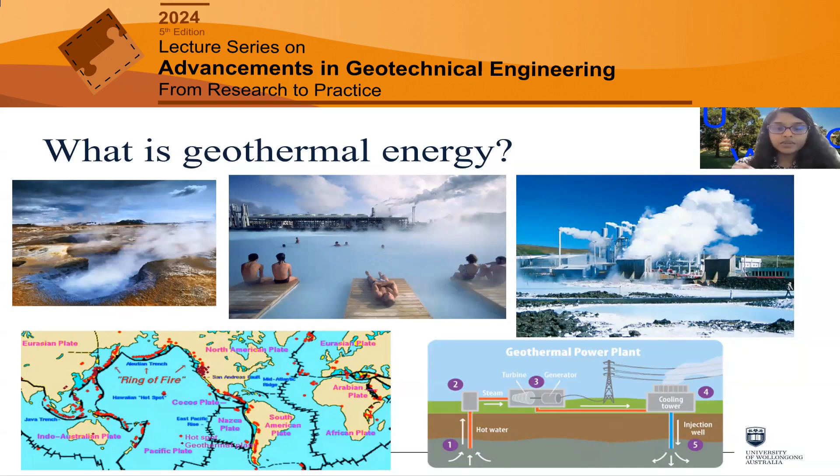And this image shows a geothermal-based electricity plant, and you can see these systems still use turbines to rotate for electricity generation, but unlike a traditional fossil power plant, they don't need to burn coal or gas. Instead, they use hot water or steam to run the turbine. So that's the difference. But geothermal energy is not just electricity. There are various other applications.

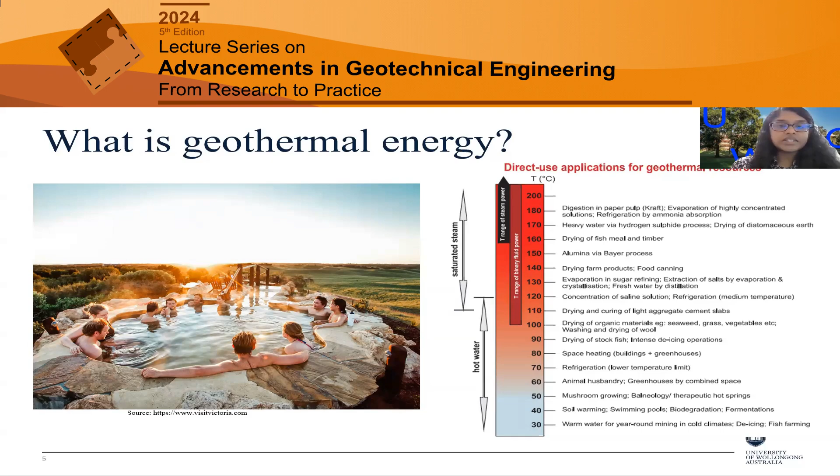As this slide shows, apart from electricity generation, we can use geothermal energy for different applications, like space heating, recreational purposes, geothermal heat pumps, and many different industrial and agricultural purposes, depending on the temperature. And this is an image from geothermal pools located in the Mornington Peninsula in Australia. These types of shallow geothermal systems are generally considered a more accessible form of geothermal energy, and can be used in residential, commercial, and various industrial settings.

So based on the example of Iceland, now I think it's clear near tectonic boundaries, volcanic areas, there is readily available, accessible geothermal heat at shallow depths. These are called conventional hydrothermal geothermal systems. They can be water-dominant or vapor-dominant systems based on the temperature and pressure. Technologies to utilize these types of systems are readily available, specifically for geothermal-based electricity. And almost all current commercial geothermal production is based on these types of systems.

However, when it comes to other parts of the world, the biggest challenge of geothermal technologies is to create optimal flow rates, because the technology relies on flow rate as well as temperature difference. And when it comes to deep reservoirs, we might need to create fractures artificially to enhance the fluid flow, which we call reservoir stimulation. In recent years, researchers have proposed various different configurations and use of different types of fluids in order to increase thermal efficiency.

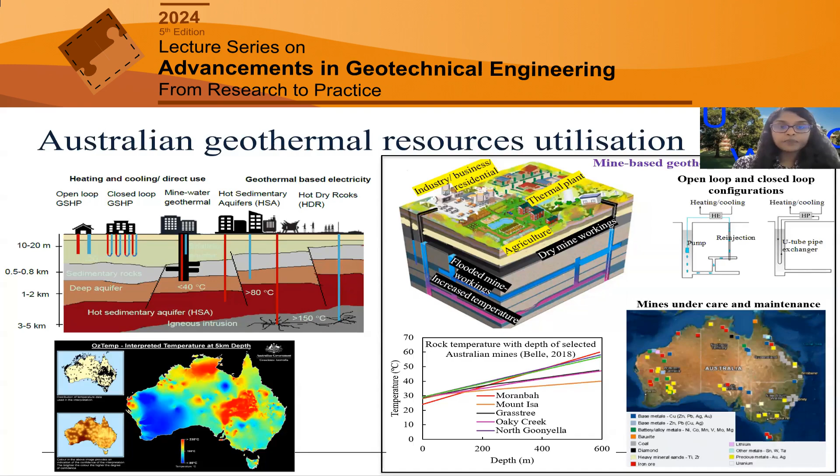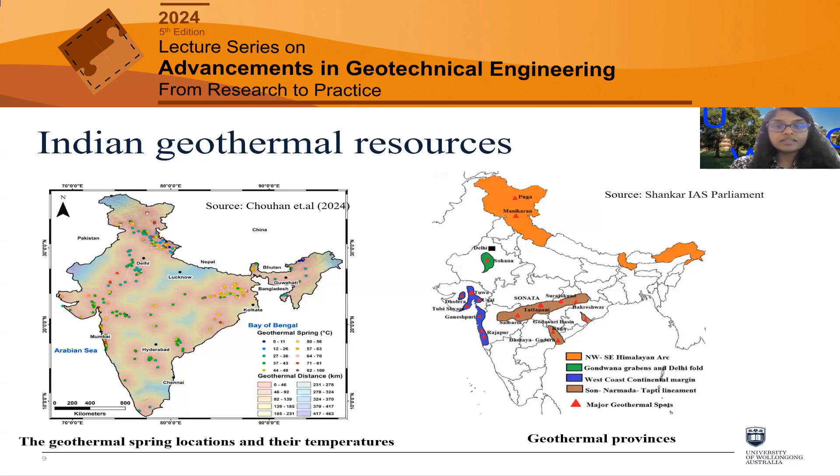But some of the challenges both countries face are high costs and lengthy timelines for exploration, the need for more comprehensive data when it comes to heat sources and fluid dynamics, and of course policy and investment support to overcome these kinds of barriers.

Next, I'm moving to the presentation regarding geomechanics research, why geomechanics research is essential in these types of fields. So when it comes to geothermal energy, geomechanics provides essential fundamental inputs in many areas. Primarily, it's very important to understand the properties of subsurface rocks and their ability to store and transmit heat. We call it reservoir characterization. And it's very important to understand the stresses and strains within the crust, because that affects reservoir stability as well as fracture propagation direction.

As I mentioned earlier, when permeability is not sufficient, it's important to create fractures artificially. And it's important to ensure integrity of geothermal wells, prevent leakages, and maintain long-term fluid transport and thermal recovery. Therefore, the knowledge of coupled thermo, hydro, mechanical, and chemical mechanisms is very important when it comes to geothermal systems. And it's a very complex problem. And this sketch summarizes these processes and how they are interrelated.

Some examples. For example, temperature, pressure, and chemical effects change fluid and rock properties. And temperature and pressure can also change hydraulic and chemical processes. They can change fracture pathways, cause mineral dissolution, precipitation, etc. So multi-physics coupling techniques are usually used to uncover these challenges.

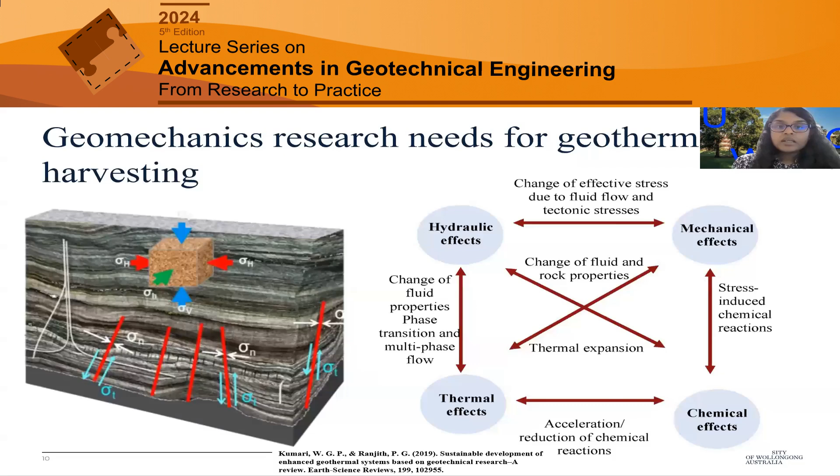Another important aspect I want to highlight is the necessity to consider the scale effect, because in today's presentation I'm highlighting mainly the micro scale mechanisms. But now here we need to consider the scale effect across these coupled processes. So we often use small scale laboratory experiments to understand fundamental mechanisms,

and micro scale observations and analysis is quite important to understand the underlying mechanisms, such as pore areas, rock fragmentation, tortuosity in fluid flow through these pores and fractures. So these types of mechanisms are quite important to explain the experimental observations. And then we need large-scale advanced experiments which can connect these micro and meso-scale scenarios to field-scale observations.

So this framework shows various techniques that can be used to capture these underlying physics to develop constitutive equations and apply that knowledge to understand coupled processes and interactions that can be applied in the field scale ultimately. Here you can see this cross-scale modeling that can capture this whole spectrum, which can be considered as a framework for future research.

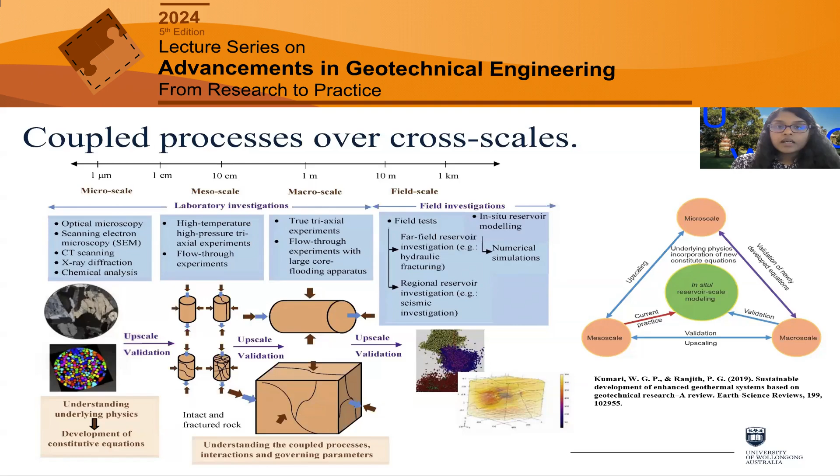Next, I would like to briefly go through some of the research studies that I conducted. First, thermomechanical behavior of granite rocks. I mainly used granite for my PhD and following research, because in Australia we mainly targeted hot dry rock reservoirs, which are essentially crystalline rocks. So the thermomechanical behavior of these reservoir rocks is influenced by various factors like rock type, mineral composition, porosity, existing fractures, and environmental conditions like temperature, stresses, fluid saturation, etc.

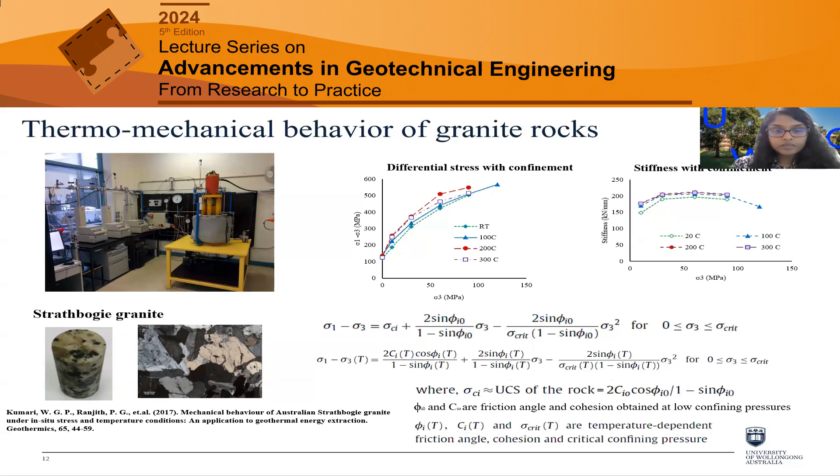Here you can see the geothermal effect of heating and cooling on mechanical behavior, because this is another important research question, because geothermal reservoirs are often subjected to large temperature gradients because of injection of cold fluids into these hot reservoir rocks. So traditionally we use water in these types of systems.

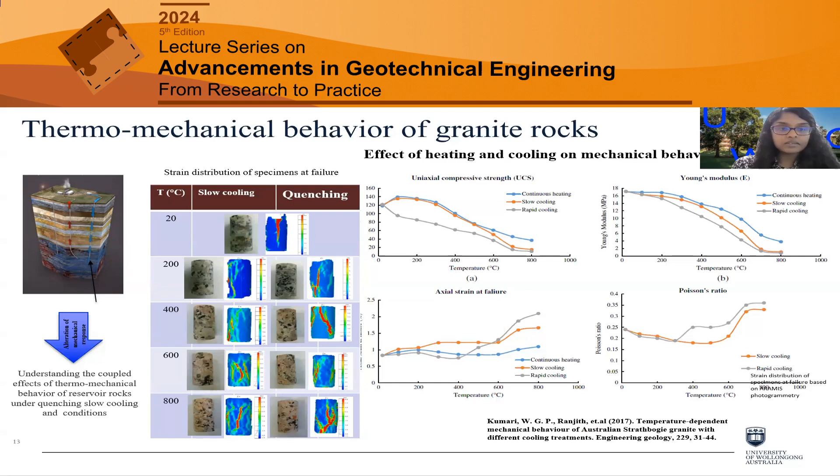Researchers have observed significant increment in thermally induced crack density after 600 degrees. The main reason suggested is alpha to beta transition of quartz and many other mechanisms. So here, this tested granite had over 50% of quartz, and we can clearly see beyond 600 degrees significant thermal damage. We further observed this with microscale observations.

In this study, we looked at effect of thermal cycles, cyclic heating and quenching, which is very common in geothermal reservoirs. And again, you can see the strain distribution during the failure. So below 300 degrees with minimal heating and cooling cycles, we can see predominantly shear-dominated, relatively simpler fracture planes, but with increase of heating and cooling cycles as well as target temperature, we can see quite complex fracture planes, especially beyond 500 degrees.

And here you can see the effect of temperature and the cyclic quenching impact on mechanical properties, again showing a significant reduction of strength and in the stiffness of the rock, as well as higher deformation and lesser brittleness at higher temperatures and heating and cooling cycles.

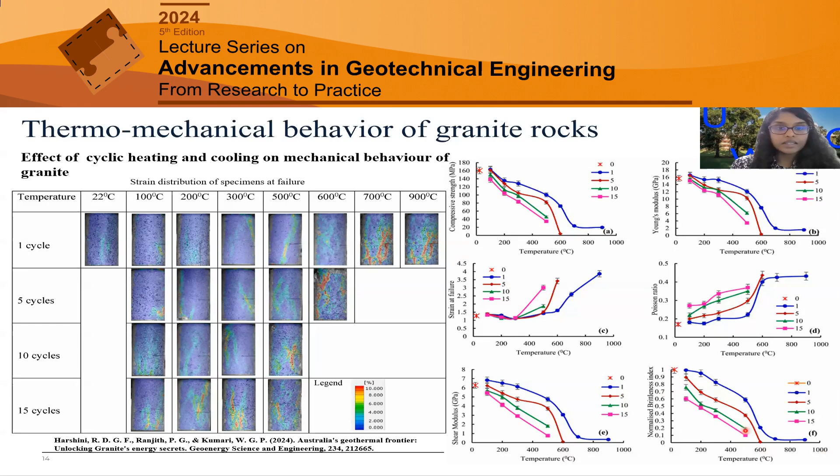We also used acoustic emission detection technology to study crack propagation in high temperature conditions when they are subjected to shearing. We know when brittle material is under stress, strain energy is released during the development of new cracks or widening of existing cracks. We can capture this energy using acoustic emission technology. Researchers have divided the crack formation into different stages, like crack closure, crack initiation, secondary cracking, crack damage, etc.

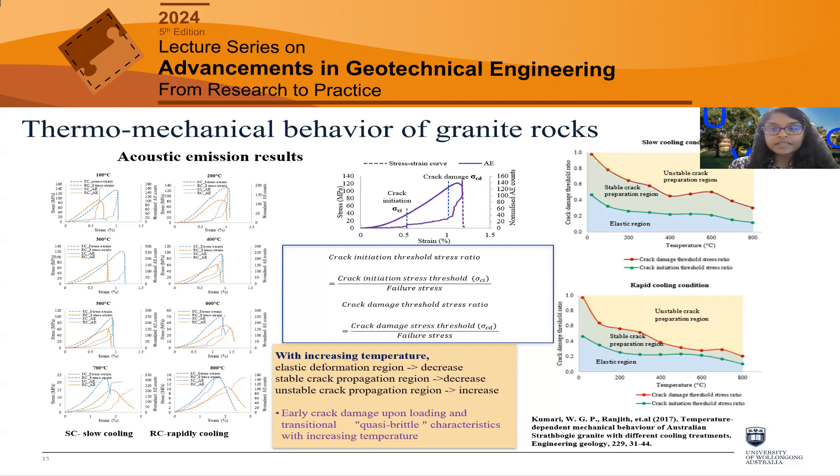And these are the experimental results for tests conducted under different temperatures and different cooling scenarios. So acoustic emission analysis further explained thermally induced damage due to heating and then cooling. With increased temperature, elastic region as well as stable crack propagation region is decreased, and unstable crack propagation region is increased, and cooling can further accelerate these mechanisms.

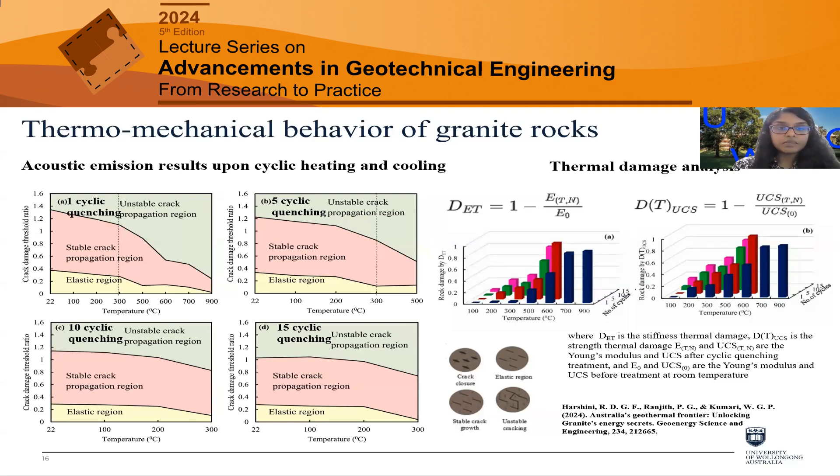Given today's focus is on integrating microstructural analysis in geothermal geomechanics, next I will move to microcracking mechanisms triggered by this thermal loading. So among different microscale techniques, computed tomography or CT imaging has evolved to quantify pores and microfractures, providing digitization of this internal structure. And by examining micro-CT, we could observe substantial matrix degradation in reservoir rocks caused by thermally induced microcracking.

And results show that propagation of cracks through grain boundaries increases significantly with the increase of preheating temperature because of the thermal stresses and the natural anisotropic nature of rocks. Rock consists of different minerals with different thermal expansion coefficients and different thermoelastic moduli, causing this anisotropy. And once thermal stress exceeds the internal strength of the rock, fractures are initiated through these weaker planes, which could be pre-existing grain boundaries or weaker minerals.

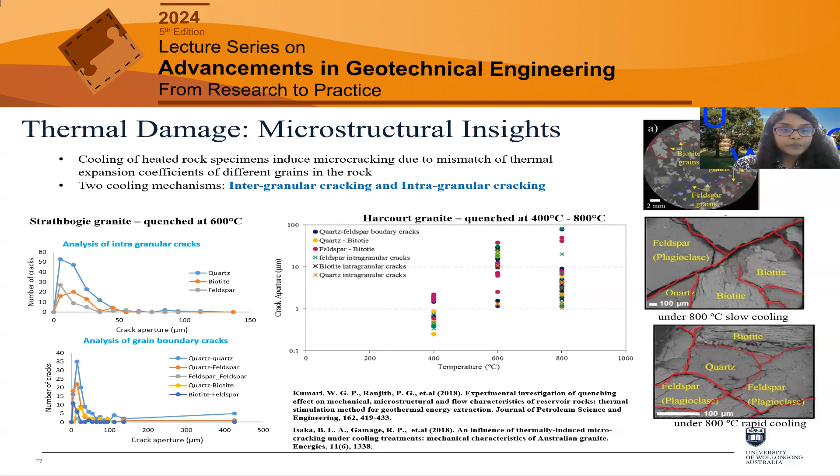And we studied again different types of rocks to understand the effect of mineralogy. And we quantified the distribution of those cracks, types of cracks, etc. And this is some more work with high resolution CT images, which were then used to develop a reconstructed 3D structure. And here we identified different minerals and cracks, as you can see here, by considering the contrast and the brightness of the CT images.

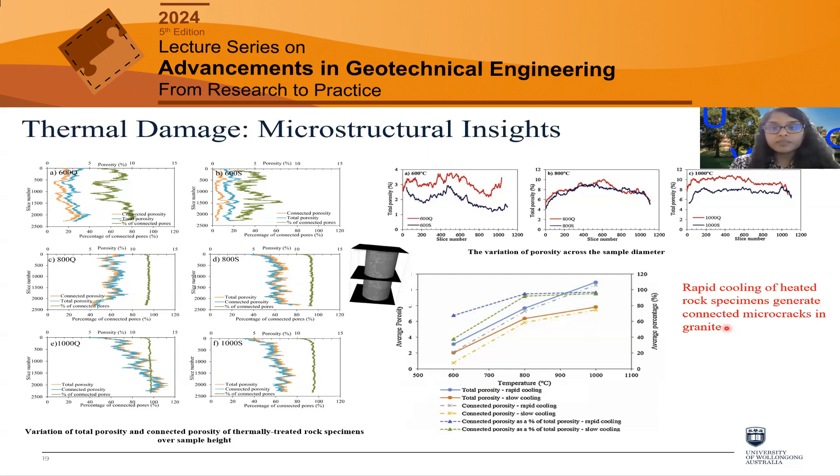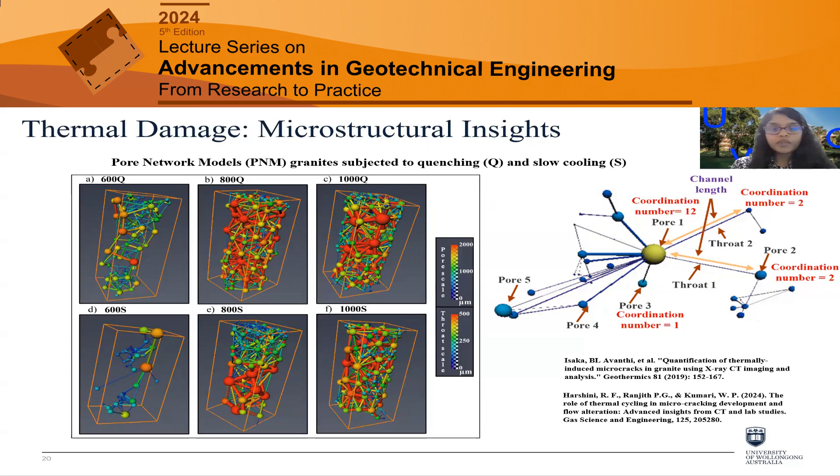And here you can see those generated models for different temperatures and cooling conditions. These are the results for cyclic quenching scenarios. For this considered resolution, which was 10 microns in our facility, we could not generate a pore network below 500 degrees. So that's another challenge with these types of microscale analysis, the challenges associated with the resolution and the size of data.

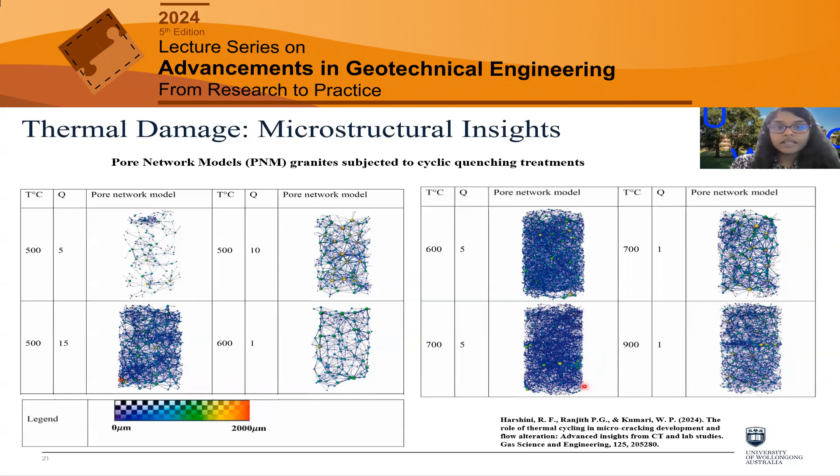Again, another thing we found is that increasing quenching cycles cause substantial damage, even more damage than a single quenching cycle with quite higher temperature. And we found large pores appear near the sample's boundary, where we get the highest thermal gradient, and tiny pores expanding internally.

The permeability of the granite samples was then simulated using these pore network models, considering fluid flow streamlines between connected pores. And here you can see the results, which show the impact of increasing temperature as well as quenching cycles. For example, the permeability was 7.6 Darcy for 500 degrees, 5 quenching cycles. It increased to 12.4 Darcy with 15 cycles. And you can see it's even higher when it comes to 900 degrees, 1 quenching cycle, etc.

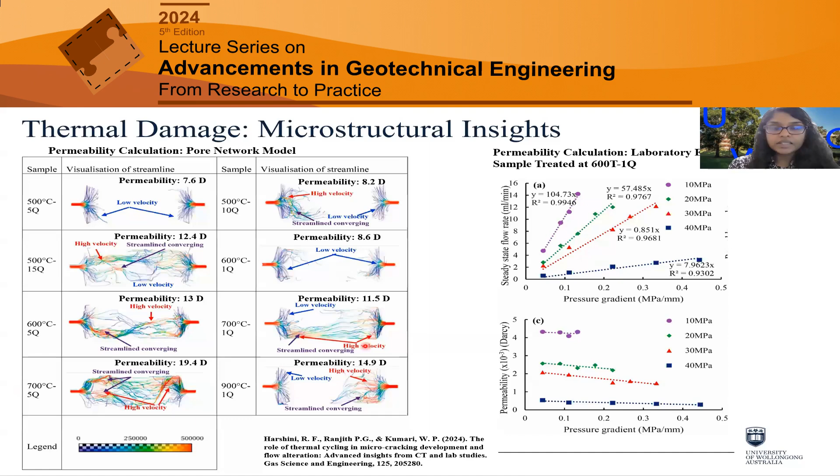We verified these simulation results by conducting laboratory experiments. And here you can see those experimental data. So this is one selected sample at 600 degrees, 1 quenching cycle. And we found a linear increment of pressure gradient, showcasing the steady state behavior and applicability of the Darcy equation in this scenario. However, with the increase of confining pressure, you can see permeability is non-linearly decreasing, showing the impact of confinement for these generated fractures. And we found the simulated results and the experimental results are in the same order of magnitude.

Next, I would like to move into the next topic, hydraulic fracturing of granite rocks under geothermal conditions and use of microstructure analysis in that area. Hydraulic fracturing in geothermal reservoirs has always been challenging because of complex stress conditions, high temperatures, presence of faults, fractures, fluid losses, and many more.

Laboratory scale experimental results can provide valuable information in fracture propagation compared to complexities in the field scenarios. So these are some of the experimental work we conducted under different confining pressures as well as temperatures. One thing I want to emphasize is the stress rate is very important when it comes to fracture propagation. And therefore, we carefully control the axial load and the confining pressure during these experiments to make sure we get a vertical fracture like this along the axis of the sample.

And in order to simulate the wellbore, we drill the sample centers up to mid-depth employing a 3 millimeter drill bit. And this is a typical injection pressure versus time curve, or breakdown pressure curve. And we found breakdown pressure is linearly increasing with confining pressure and linearly decreasing with the temperature. And also the rate of breakdown pressure decreased with the increase of pressure. And in this study, we also developed modified breakdown pressure criteria incorporating temperature-dependent parameters of the reservoir rocks.

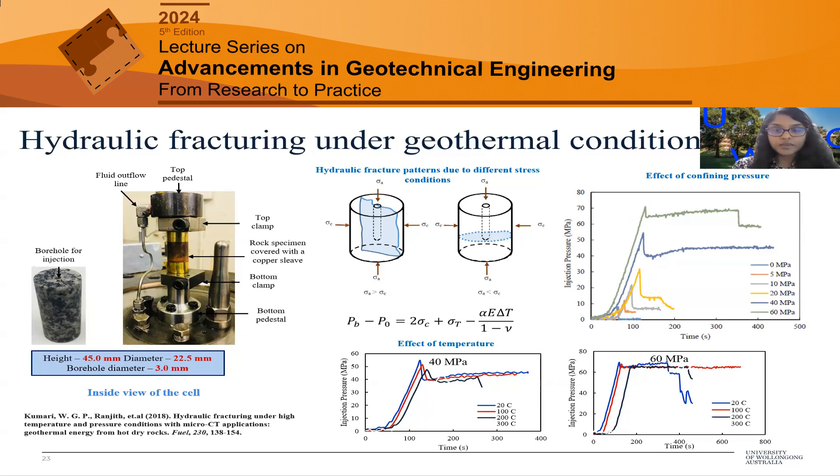Another work I could contribute is use of different types of fracturing fluids other than water. So here you can see results of water, supercritical carbon dioxide and CO2 foam. So carbon dioxide changes its physical state from a gas to a supercritical fluid in high pressure and high temperature scenarios. And when it comes to carbon dioxide-based fracturing fluids, this phase transition is a very important consideration. So we need to carefully control temperature and pressure and monitor rheological parameters like viscosity and compressibility to ensure the fluid is in the correct state.

And here you can see this breakdown pressure curve. We can see linear pressurization in the wellbore, and compressibility of the stimulation fluid governs this wellbore pressurization rate, with water being the highest and supercritical CO2 being the lowest. So we observed that in this data. And fracture initiation, or the breakdown, was identified as a sudden drop, as you can see here in these breakdown pressure curves.

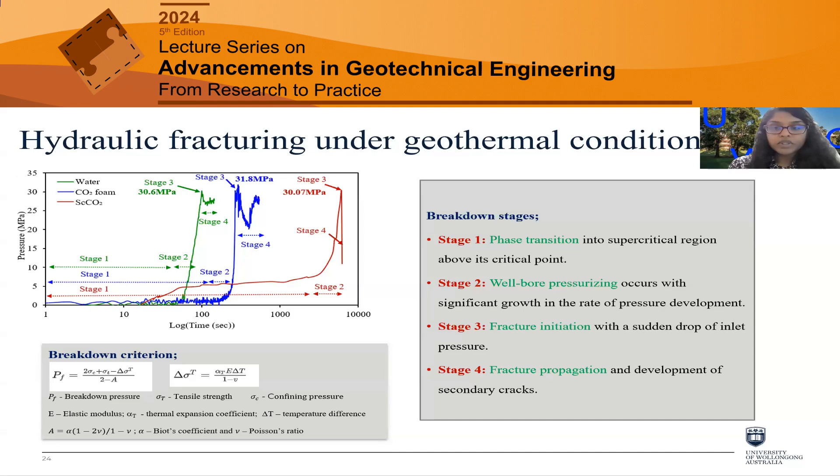Another thing is post-breakdown scenarios and how different fluids impact post-breakdown. So here you can see we developed modified breakdown pressure criteria incorporating fluid flow pressure and thermoelastic effects. One thing I want to highlight is the type of fracturing fluid, in situ stresses and temperature are very important factors when it comes to fracture propagation and development of secondary cracks, which I will introduce briefly next.

And these are some results from CT scanning of these hydraulically fractured samples. So according to these images, fractures tend to propagate along grain boundaries. However, while they propagate continuously, they tend to break weaker minerals in the flow path. And under confining pressures like this, these are under 20 megapascal confining pressure, you can see closure of fractures and grain crushing in confined scenarios.

When it comes to high temperature, this means the rock is heated, in this case 300 degrees, and we inject cold water. We can observe some thermally induced fracture zone close to the wellbore, but you can see the thermally induced fractures are extremely small because the resolution of these images is 10 microns.

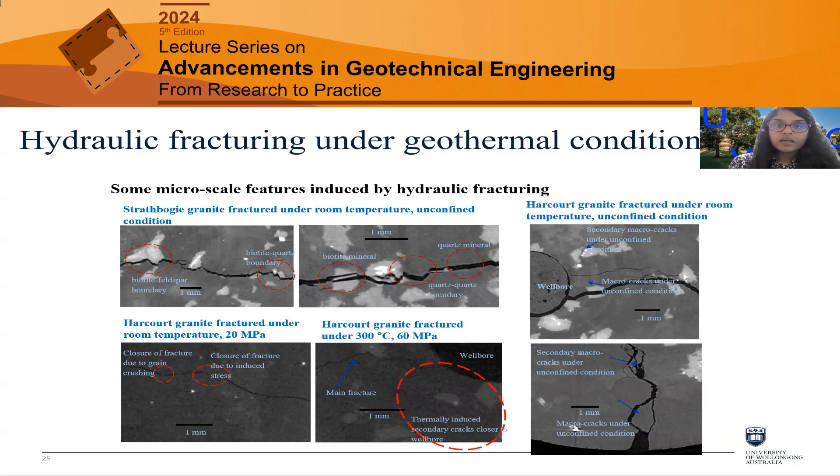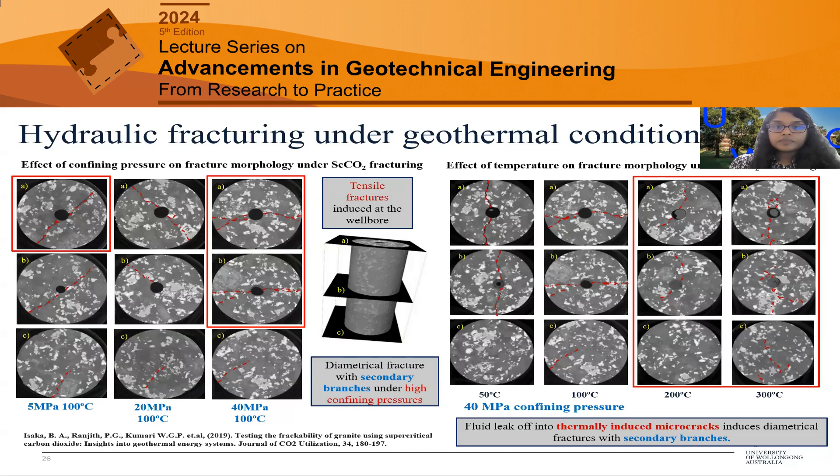We found temperature significantly affects the morphology of induced fractures. And here you can see how fracture density and fracture tortuosity change. For example, here you can see at 50 degrees and 100 degrees the change of fracture density. These observations support that under high temperature conditions, CO2 has the potential to percolate into thermally induced tiny microcracks, propagating existing cracks. And another thing we observed in this test was, compared to water fracturing, complex fracture patterns and multiple fractures are developed with CO2.

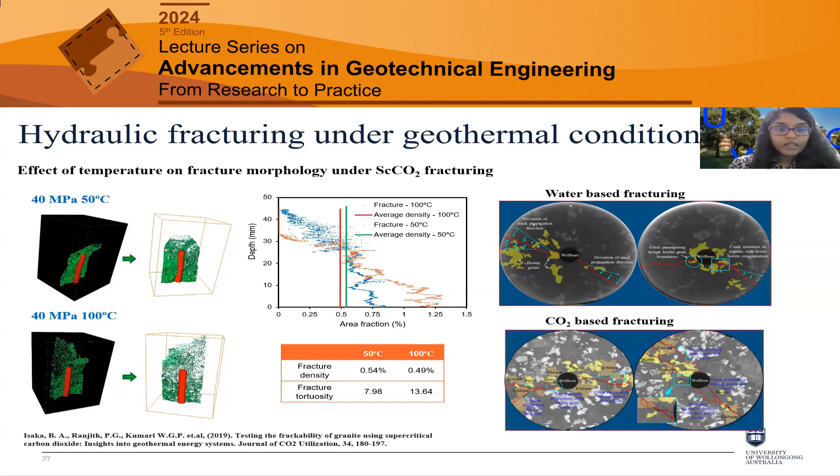These microscale observations help us to understand the flow behavior of these induced fractures. So we did laboratory experiments with fractured samples to understand the permeability. As I mentioned, confining pressure has a significant impact, and you can see nonlinear reduction of permeability, or closure of the fractures, with increased confining pressures. Another finding is carbon dioxide-induced fractures were more than 3 times higher than water-induced fractures, as we observed with micro-CT images.

My recent work looks at nanoparticle enhanced foam-based fracturing fluids to enhance fracture conductivity, because CO2 has some challenges when it comes to hydraulic fracturing, like very low proppant carrying capacity. Therefore, incorporating CO2 foam can reduce those kinds of challenges. And another area I'm working on is stress corrosion fracture growth due to rock fluid interactions using micro-CT.

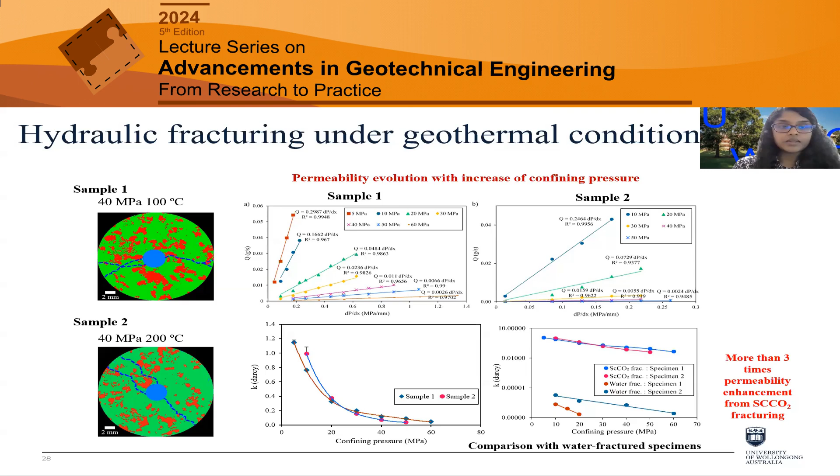So today I presented some selected research relevant to thermal damage and fluid-induced fractures with focus on microstructural analysis in geothermal geomechanics. So overall, thermally induced microcracking and core expansion play a very important role in damaging rocks in geothermal environments, affecting fluid flow and fracture behavior.

The choice of fracturing fluid like water, carbon dioxide, or foam can significantly impact how fractures form, and especially foam and CO2 offer benefits in reducing water use and creating more complex fracture networks in low permeability rocks. We have very limited understanding of complex mechanisms associated with geothermal applications.

So fundamental research in geomechanics is very important in these types of new directions, because essentially geothermal energy related work requires a lot of work when it comes to characterizing the reservoir and then creating the fracture network and then operation. All these require a lot of understanding of geomechanics research.

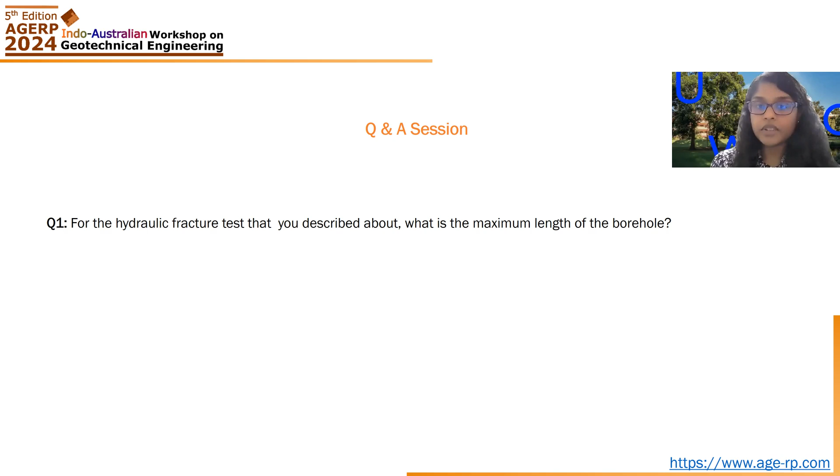This is probably an unanswered question in the geothermal geomechanics discipline, because I visited one petroleum hydraulic fracking field, and when I discussed the challenges with the field engineers, we basically understand the fracture propagation through fluid losses and change of pressure. There is no way you can take images during the field scenario under these deep

geological conditions. So I think my work mainly tried to understand why and how these fractures propagate and the impact of different types of fluids and temperature, that sort of scientific understanding. But having said that, to explain this in the field scenario, we need a lot of future work.

I know some researchers are working with the industry using laser, maybe optical fiber, that type of technologies to find that link between laboratory studies and the field scenario, especially in the petroleum environment. But when it comes to geothermal, temperature is a big challenge to create sensors that work under these types of pressures and temperatures. A lot of things need to be done in this area.

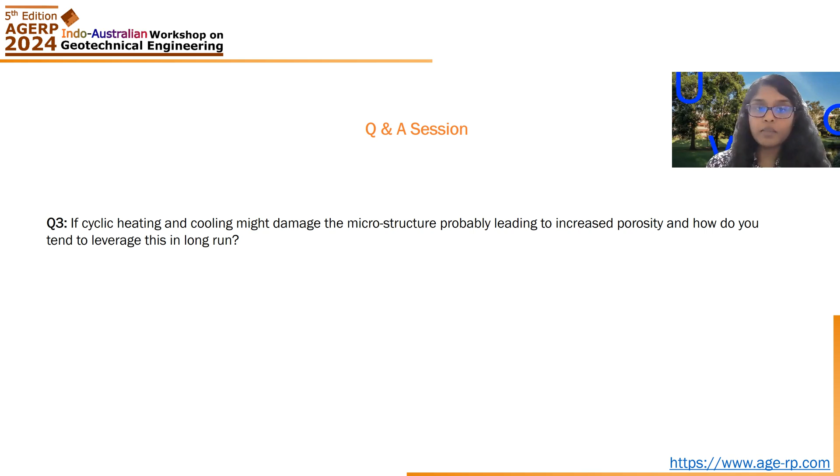But having said that, mechanical tests show even heating causes damage, but heating followed by cooling produces more damage. And if you have higher cooling rates, damage would be even higher. So I could capture those scenarios with mechanical tests. Based on the mechanical experiments, by looking at the uniaxial compressive strength or stiffness or brittleness, we can assume there would be less thermal damage under heated condition without any cooling. But I don't have any experimental evidence.

That's true. Granite is quite a chemically resistant, strong, brittle rock. But when it comes to carbon dioxide, the viscosity is low compared to water. So it allows it to propagate through microfractures. We believe that's the reason for CO2 induced fractures, although they are microfractures. You can very clearly see water induced fractures, but that's only one major fracture. When it comes to carbon dioxide, there are multiple fractures.

Although the fracture aperture is small, because of the ability to percolate through the microfractures with very low viscosity, I think that's why permeability is high in CO2 fractures, fractures caused by carbon dioxide.